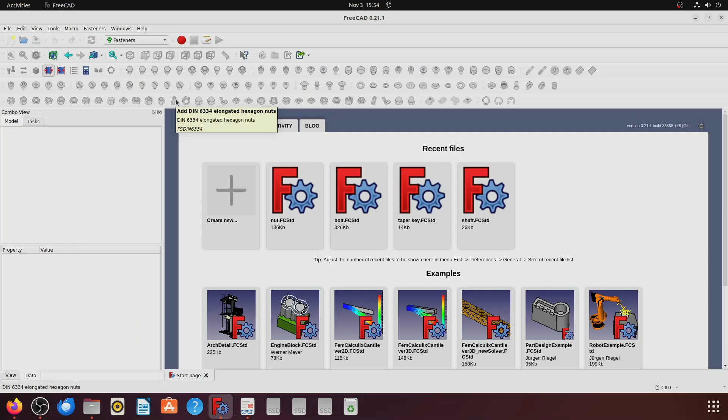So here is my FreeCAD. I will go to Tools, Add-on Manager. I will search for A2plus, and I will install it. Once I install it, I have to restart FreeCAD. So the FreeCAD will be restarted, and meanwhile...

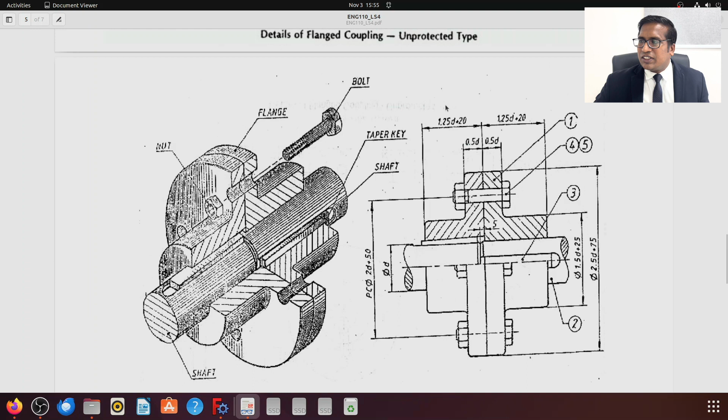You can see the assembly file here. In the assembly file, I can see the flange and a shaft. There are 2 flanges and 2 shafts on either ends, and there is a taper key, 2 taper keys on either ends, and 4 bolts and 4 nuts, as given in the bill of materials here. So 2 flanges, 2 shafts, 2 taper keys, 4 bolts and 4 nuts.

Now I will create a sub assembly. I will not import 2 flanges and assemble them together, then again 2 shafts, 2 taper keys. Instead of that, I will make one sub assembly. I will make one pair of flange, shaft and taper key. Then later I will import another pair, and I will assemble it together.

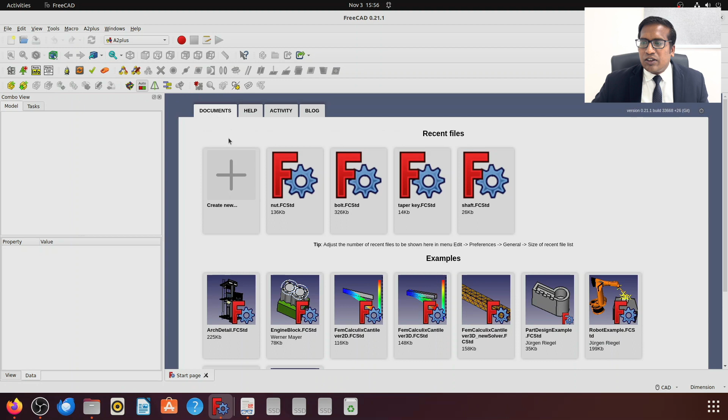Now let me go to FreeCAD. So let me choose A2plus. I will create a new file. So once I create A2plus, you can see these 2 toolbars appearing here.

In these 2 toolbars, the bottom one I can use to import, and the top one is for giving constraints and checking my degrees of freedom and everything. So I will just import a part. But before inserting, I have to save the assembly.

I will save it. I will go to documents, recordings, assembly. So I will create this as a sub assembly. I will just give a name, sub assembly, and I will try to import my flange.

So the first component, like in SolidWorks, the first component you import will be fixed. When you import other components, like the shaft, we have to give mating conditions. If you properly understand assembly, how to do assembly in CAD software, you have to give at least 3 mating conditions to properly fix 2 different parts.

The first part which you introduce will be always fixed. For example, the flange here is always fixed. When you try to move it using 'move the selected part under constraints,' you cannot move it because it's fixed.

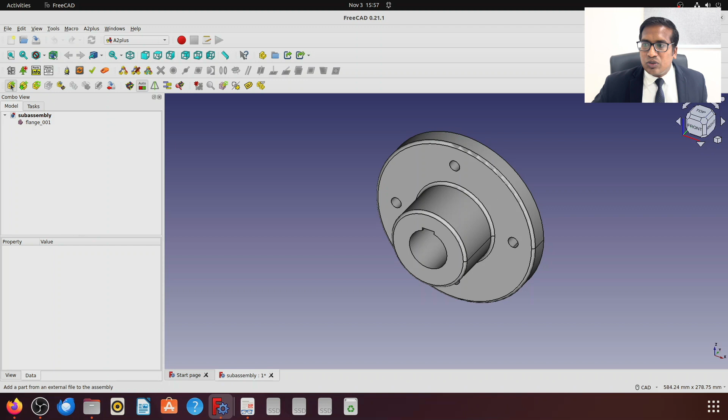But if I import a shaft, this is my second component. Whenever I introduce a second component, this can be easily moved. If I give the same 'move the selected part under constraints' and try to move the shaft, you can easily move it. So the first component will be always fixed.

The second component, we have to create the mating conditions such that they can be assembled together. The mating conditions, I say 3 mating conditions should be provided. Only if you give 3 mating conditions will it be properly fixed and properly assembled to the fixed part.

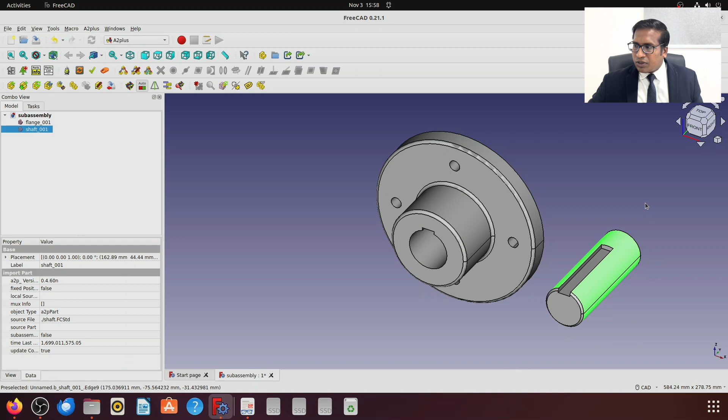Now, if I click the edges, the first thing is I have to make sure this goes inside this. If I go into the assembly file, I can see this outer part is on the other side. So this should come over this side.

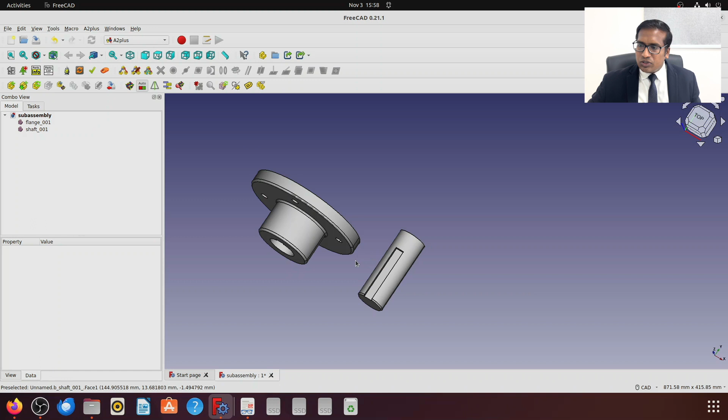What I will do is first select these two. I will select the inner part of the flange and the outer part of the shaft. Once you select, you can see the constraints. The constraints which are possible alone will appear, and the other constraints will be grayed out.

So here I have two constraints: axis coincident constraint and axis parallel constraint. I want these two axes to be coincident, only then can I insert the shaft into the flange. So I will click this.

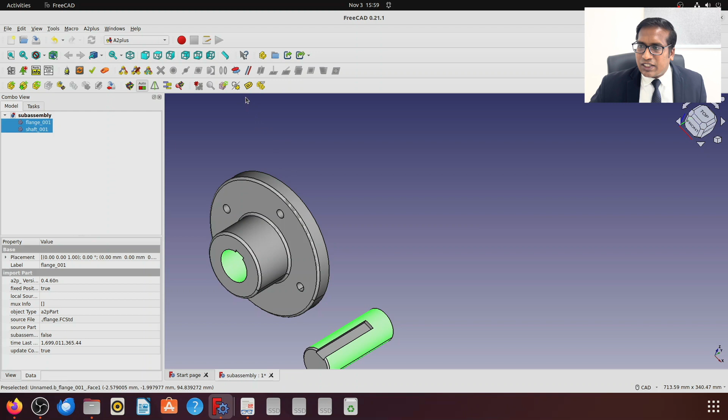Once I click this, you can see it has properly done. But I want this side to appear on the other part, so I will give flip direction. Once I give flip direction, you can see it has flipped its direction. Now I will just give slow solve and accept.

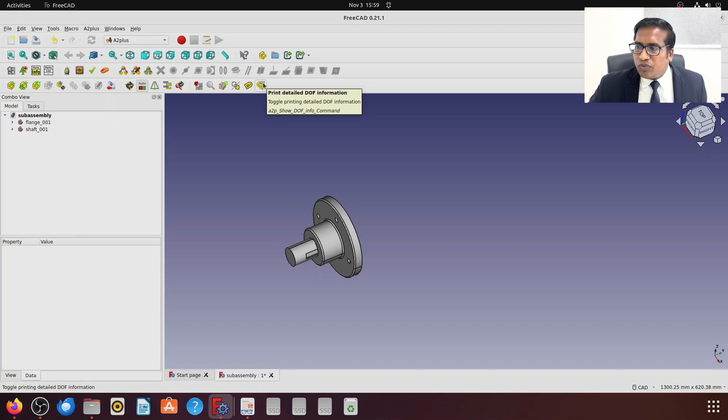Okay, so if you check, this is my icon to check the degree of freedom. If you click it, it will show you the shaft has 2 degrees of freedom. The flange, which I imported first, is fixed. Now, if you click here, you can see I have given one mating condition between flange and shaft. I have to give 2 more to properly assemble it to the flange.

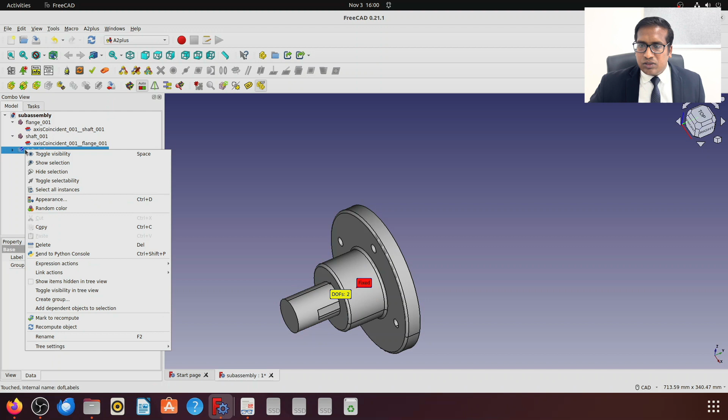Now what I will do is click, see, I can move the shaft. If I click this, move the selected part under constraints, see, I can move the shaft. I cannot move it in other directions because we have made the axis coincident, so I cannot move it on any other plane. I can just move it along the axis. That is the only motion possible.

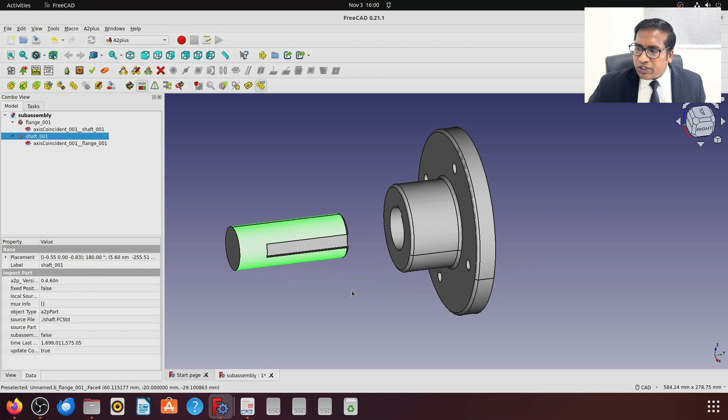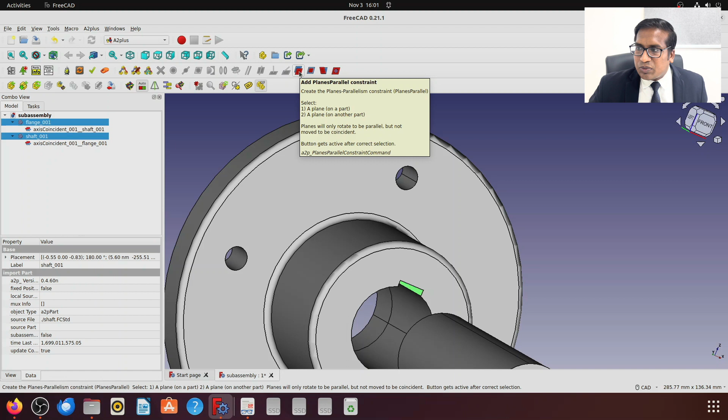Now what I will try to do is give this. Let me look into this. I am trying to give these 2 parts, selecting both the right sides. Once I select both right sides, you can see other sets of constraints appearing, but not the former ones, and the former ones are grayed out. You can see that here. Now I can have planes parallel constraint and planes coincident constraint.

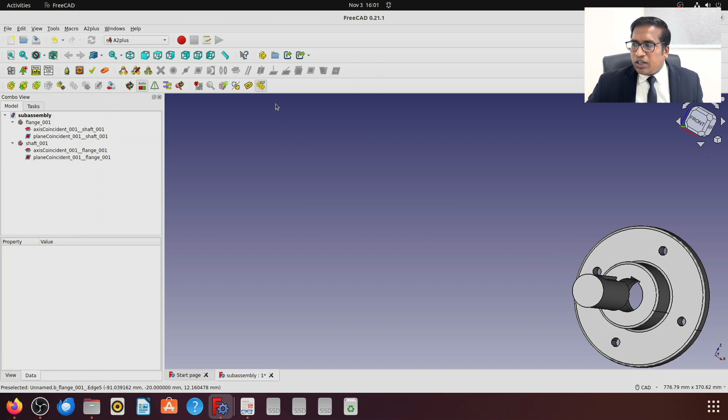So what I will give is planes coincident constraint here. I will solve it, and you can see the shaft has turned actually. The shaft was in a different rotation before. Now it has turned such that both things are now in constraint. So if I solve it and accept it, now things are fine. So now I have constrained 2 things.

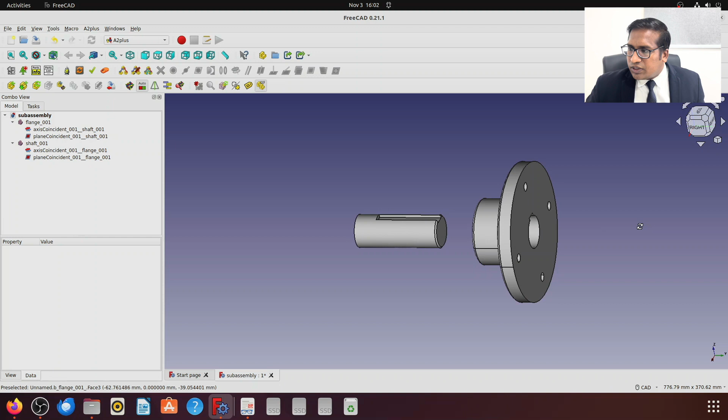If I check degrees of freedom now, see, still only 1 degree of freedom left. That we will do now. So I will go for here. I know these 2 axes, these have to be in line, because if you see the assembly drawing, they have to be in line. So once you select these 2, you can see this: axis coincident, which we already gave, and this is circular edge constraint, and this is axis parallel.

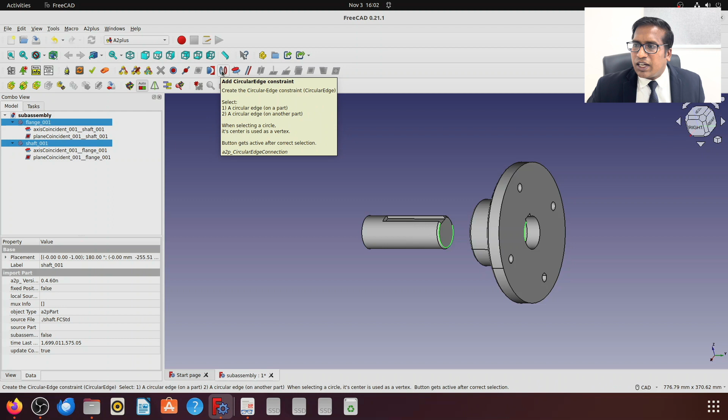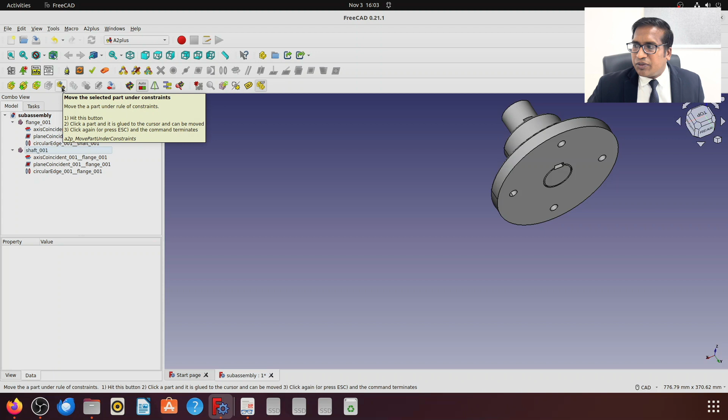So what I will give is point on line constraint and point identity constraint, and here this is peer identity constraint. I think I should give circular edge. Let me try. Yes, so once you give circular edge, this is properly fitted. So if you accept, and check the degree of freedom now, see, both degrees are done, one is fixed, the other is 0. So if you try to move now, you cannot move it because it's properly assembled. The shaft is properly assembled to the flange. See, if I click this and try to move it, no, I cannot move. So this is how it works.

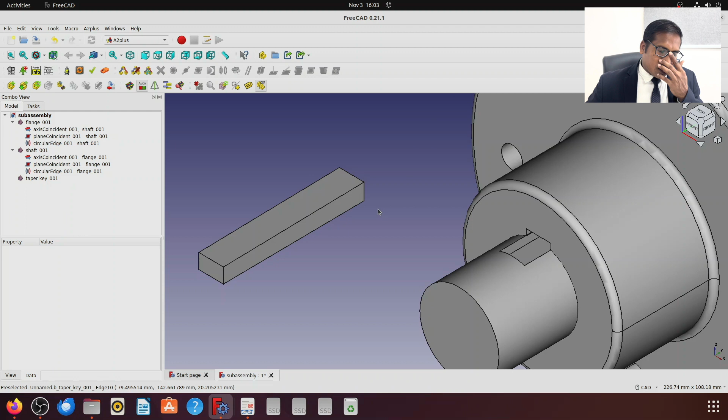Now let me try to insert the shaft taper key. So I will include the taper key here, open. In my taper key, as I said, one end is 9 mm, the other end is 0.8 less than 9, which is 8.2 mm. So I'll just measure to make sure which is my 9 mm end. Okay, so this is my 9 mm end, so I'll just delete it, and this 9 mm goes on the right side, like here, this part, this is where 9 mm goes.

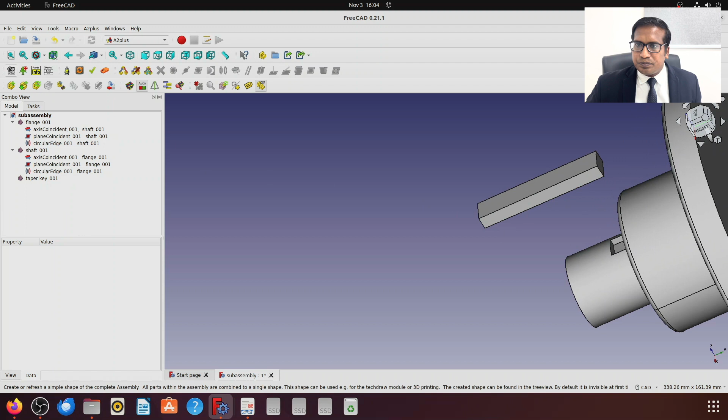So what I will do is first I will select the 9 mm edge. I will select this edge, and I will select this edge. This both I will give axis parallel, solve, accept.

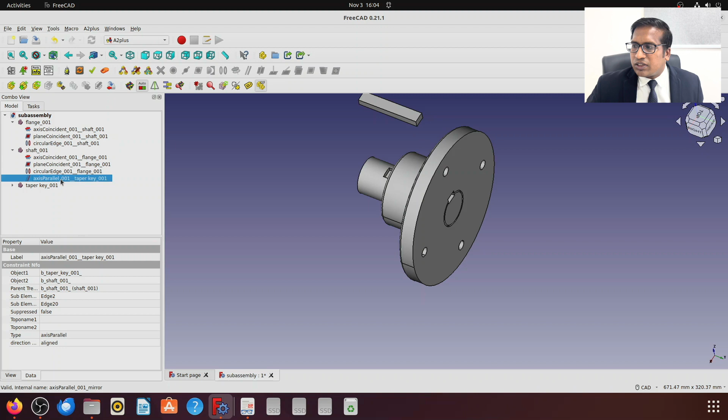Okay, now sorry, I think there's a mistake. 1 minute, I'll just... no, it's fine.

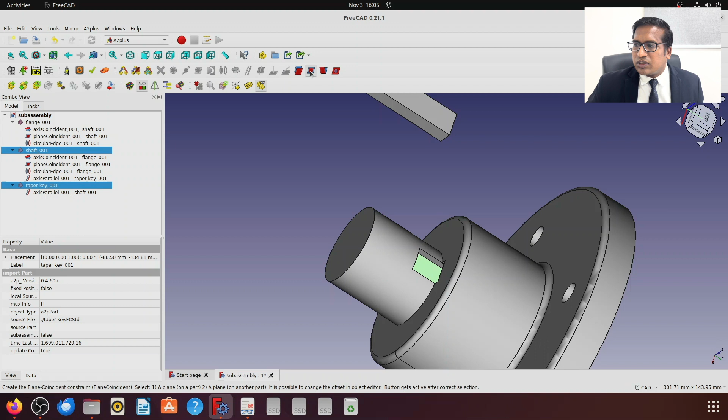So I will select the bottom of this and I will select the bottom of this. So I will give this as... okay, I will make sure these are constrained. Plane constraint, so I will give yes. Now I will select this part and this part. So this is my third mating condition. So if I give plane constraint, it will fit like this. Okay, it's fine.

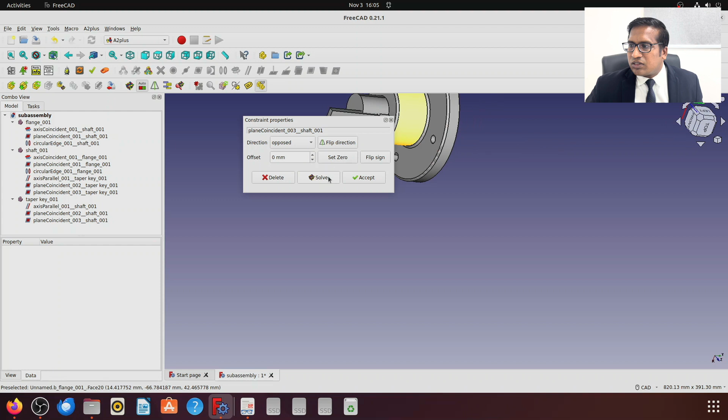But still, if I check the degrees of freedom, I still have 1 degree of freedom left. So what I will do is delete this axis constraint. I think this is creating an issue. Let me check.

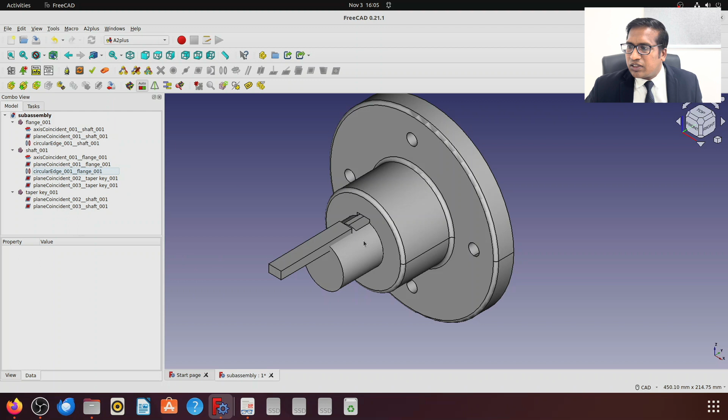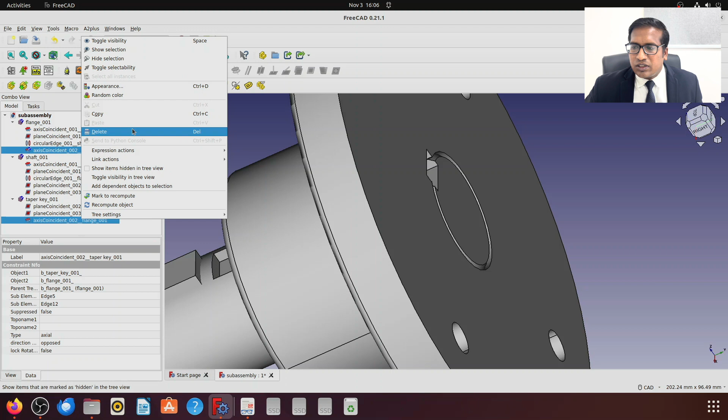I will delete this axis parallel constraint between these two, and instead I will click the top and this top face. I'll make sure this is axis parallel, axis coincident, with no constraint mismatch, so I should not do this. I will just delete it, and now better I will select this face and this face. If I make it constraint, now it solves. Perfect, so this is how I solve it.

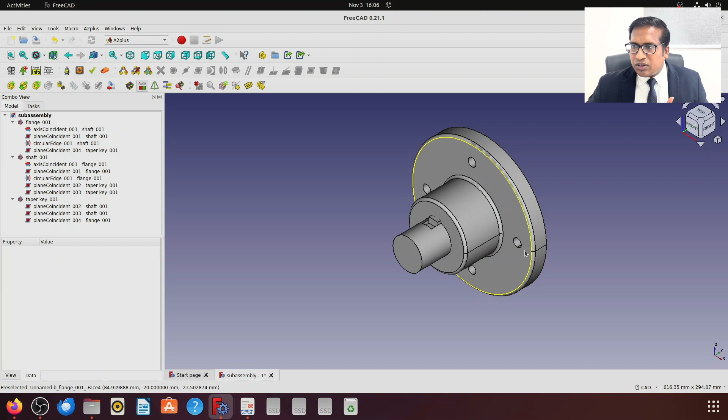Now if I go here, see, I have completed this sub-assembly. This is what I wanted to tell you. Now I have two ways. I have this sub-assembly, and I will create another assembly file and import two of these sub-assemblies to bring them together. This is one way. The other way is to again import a flange, a shaft and a taper key, and attach this to the fixed flange. I can do both ways, but the smart way is the first one. So I will save this.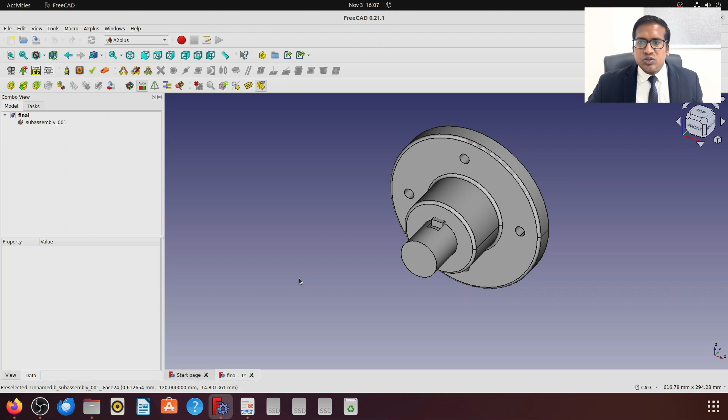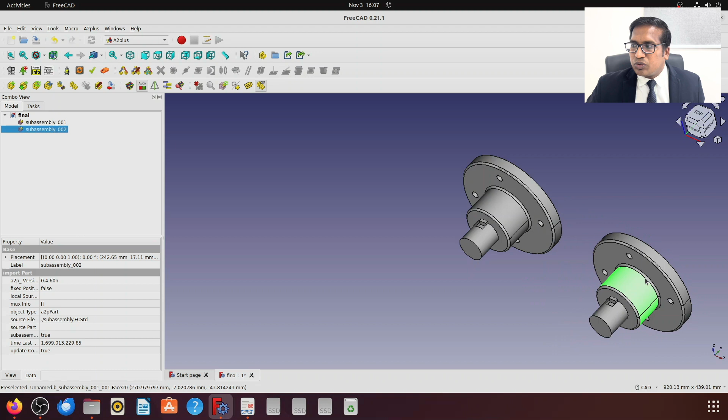Then I will open a new one and save this as the final assembly. I will import the sub-assembly here. So this is my first sub-assembly. Once you import the first sub-assembly, it will be fixed, as I always say, the first part will be fixed. Now if I import the second sub-assembly, the second copy of it, this will be movable. If I try to move this, I can move it everywhere, anywhere, but you cannot move this one, because it's the first one I imported, so it will be fixed.

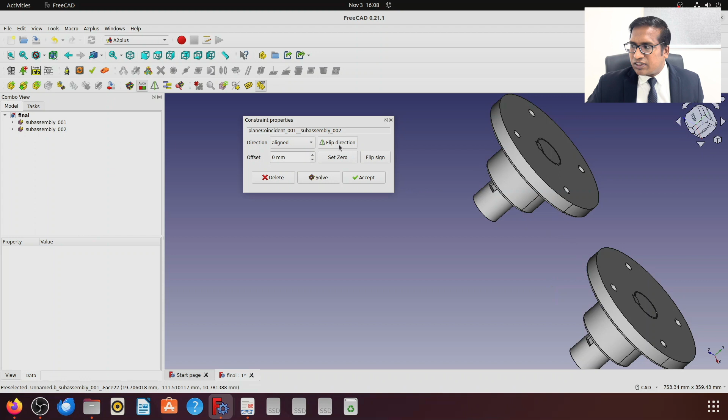Now let me create the mating conditions for this, so it's easy for me. I will click this and I will click this, and give a plane constraint. If I give plane constraint, it will be done, but I have to flip the direction. I have flipped the direction and give accept. It is fine, it's done. Now if you see, if I try to move it, you can understand, I can move it along this plane.

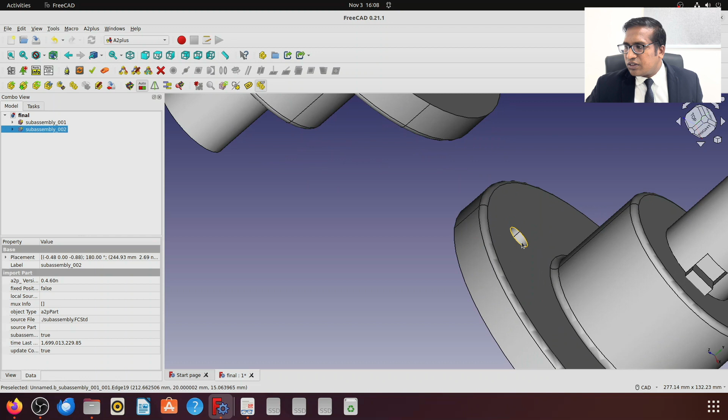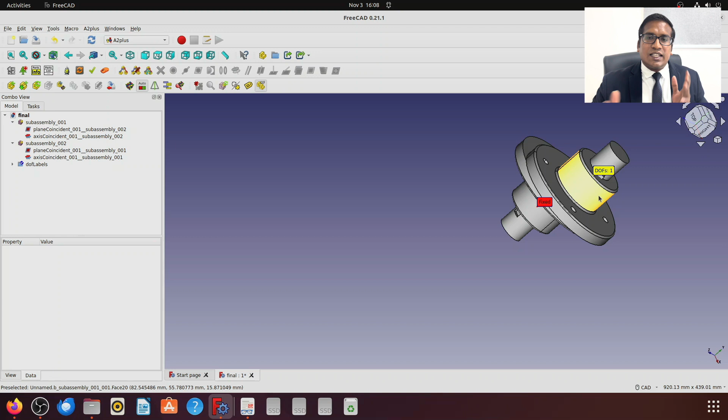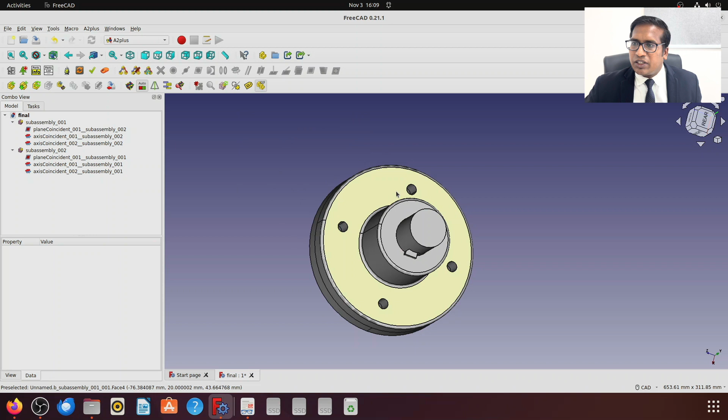Now what I will do is select this axis and this, any one, from either of the flanges, then give axis coincident. Once I give axis coincident and accept, if I check the degrees of freedom, one is fixed but still 1 degree of freedom is left. So if I give another mating condition, checking there are 2 mating conditions, this degree of freedom will be 0, so it will be properly assembled. I'll delete it now, and select this and this, give axis coincident, solve and accept, and it is properly mated. If you check the degrees of freedom now, the first flange, the first sub-assembly is fixed, and the second sub-assembly is properly assembled with no degrees of freedom, it cannot move.

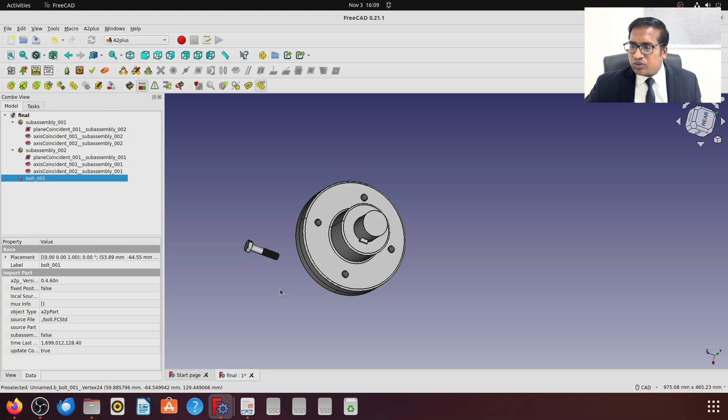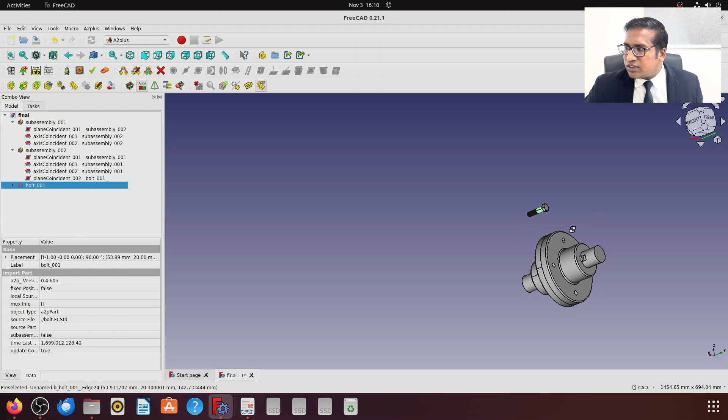Now I can insert the bolts and nuts. So for the first bolt, I can open it here and bring it here. I have to give 2 mating conditions. I will select this bottom and this part and give plane coincident. That is fine, solve, plane constraint, plane coincident. Now I can select this outer part and this inner part, and if I give axis coincident, it will easily fit in. So these are the 2 mating conditions that I can provide to a bolt.

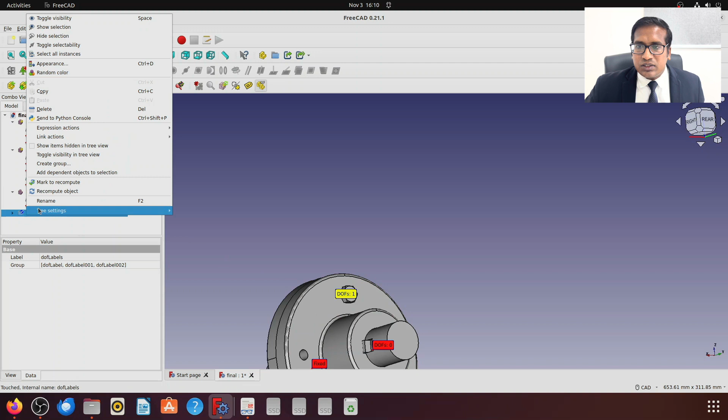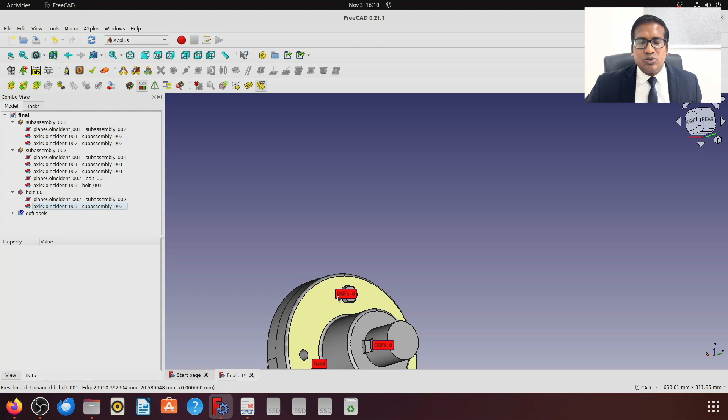But still if you check, there is 1 degree of freedom left. To solve this, click the axis coincident you just gave and edit it. Here you can see lock rotation is false. If you arrest the rotation by clicking true here, then it will be properly fixed. If you see the degree of freedom now, it is 0. This is how we do it. Now let me insert the bolt.

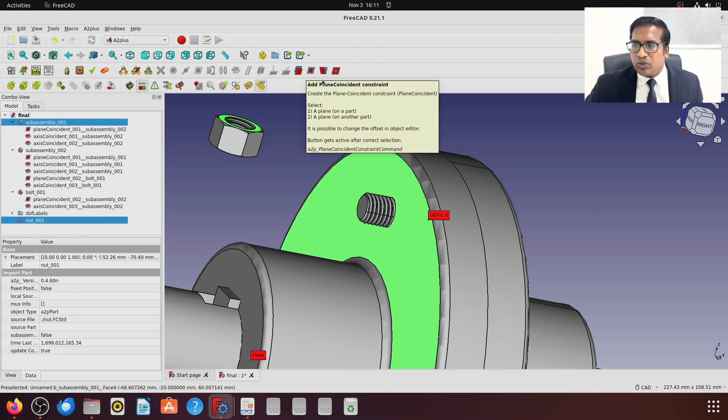Let me insert the nut. So I have my nut here, I will select this face and this face, the same as I gave for the bolt, a plane coincident constraint, solve and accept. Let me select this circle and this, select both and give axis coincident. So axis coincidence is done, and here if I give lock rotation as false and accept, let me check the degrees of freedom again. See, still 1 degree of freedom left in the nut.

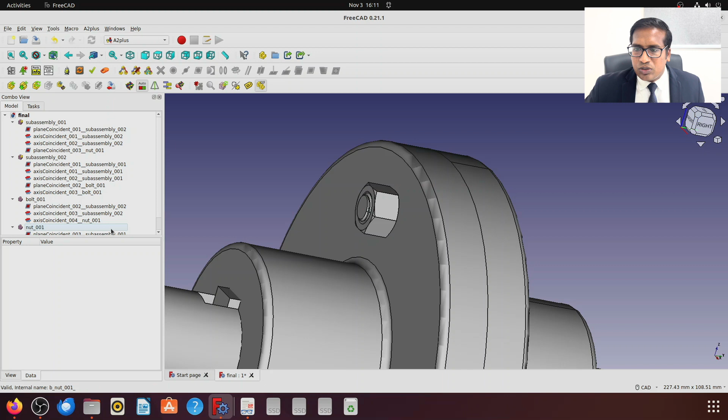So again what I will do is go to the nut, go to the axis coincident, and click true. If I do this and give accept, then checking the degree of freedom, it's proper, all degrees of freedom are properly arrested. So I will go to the isometric view and fit all. This is how my flange coupling looks. You can repeat the bolt and nuts for the other 3 holes to complete this. Thank you all.